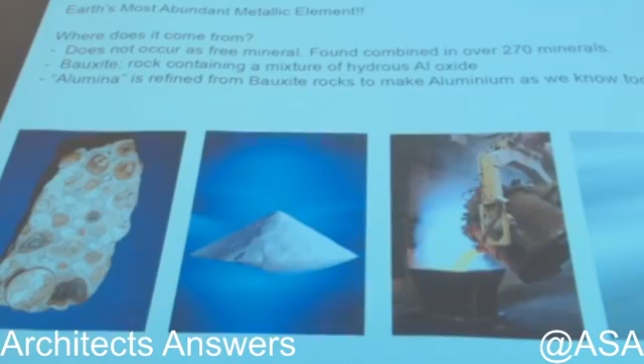So it comes from bauxite, and it's also found in over 270 minerals, but mainly we get it from bauxite, and from bauxite we get the hydrous aluminum oxide or alumina, and then it's refined. So 4 tons of bauxite will give you 2 tons of alumina, and then that will give you 1 ton of aluminum. So it really wasn't used until the technology caught up with the methods of extracting and forging and purifying it. So in the beginning, it could be used as a decoration or something valuable, like this baby rattle, and it was so valuable at the time that the top of the Washington Monument in Washington D.C.

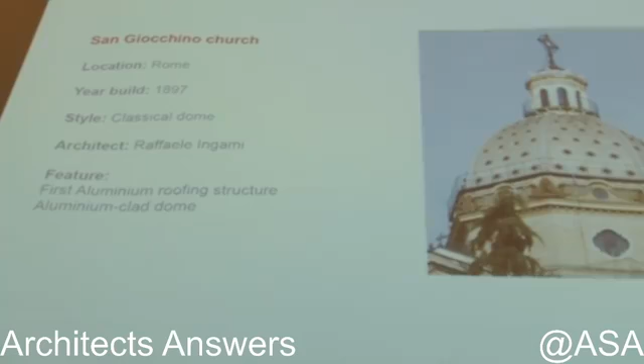It is solid aluminum at a cost then, or today, of $640 per pound. So you can imagine the value then of that piece of aluminum. But as time went on and technology increased, we started to use it on buildings. This is the first example of aluminum roofing: clad domes in Rome in 1897, and then the Art Nouveau facade from Otto Wagner in 1902.

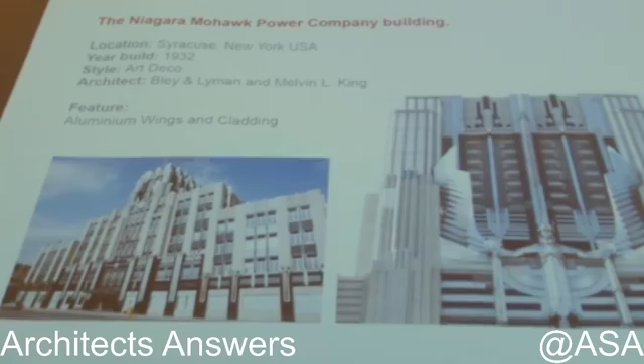Times Square Building in Rochester, New York, 1930, but mainly used as the ornamentation on the top, as well as this building in Syracuse. It's quite malleable and formable, so they used it as a decorative application. And it wasn't really until 1950 that it was used as a full cladding application. This is the former Alcoa building, or the Regional Enterprise building. So the entire 30-story building is this stamped solid aluminum panel.

There are three main types of aluminum cladding products. We have rolled, cast, and extruded, but for our purposes here, I'll just talk about rolled products, as that's primarily what we use in the facade business, although we do use quite a bit of extruded products as well. There are two main types of rolled products. We have hot rolled products and we have cold rolled products.

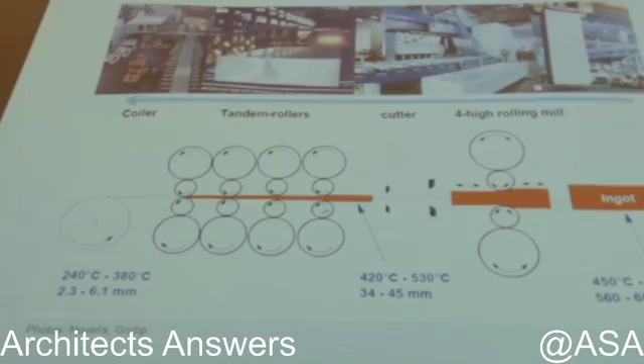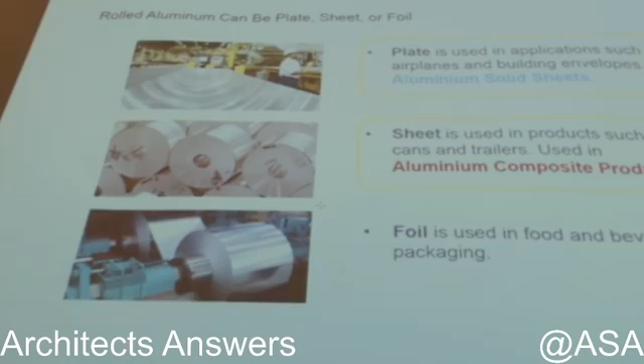And from these products, we can get plates, sheets, and foils. The foil industry is a big industry for aluminum, as you can do lithography and other kinds of foils. Also, for our sake, the sheet and solid sheets come from plates and sheets we use in thicknesses of 0.3 millimeter all the way up to 3 millimeters, and this can be used in composite material as well as solid sheets by themselves.

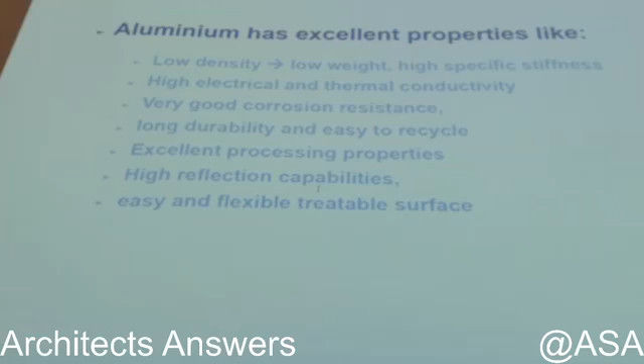As I said earlier, aluminum is an element, obviously, and by itself it does have some excellent properties. It's low density, it's resistant to corrosion quite well, and it's durable, and you can recycle almost 100% of solid aluminum. It's great for processing and it has high reflection capabilities. But by itself, it's not appropriate unless we add other parts to it. And this is where we get into alloys.

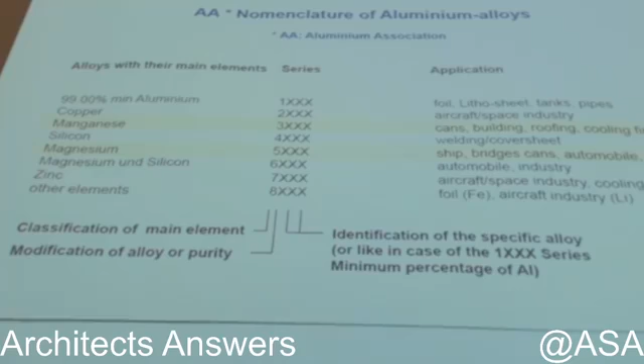For architectural projects, for the rolled products, we primarily use the 3 series and the 5 series. So this is a manganese or magnesium additive, which increases its strength. But from there, we cannot just use it like that. We have to adjust its hardness in order to be applicable to a specific use.

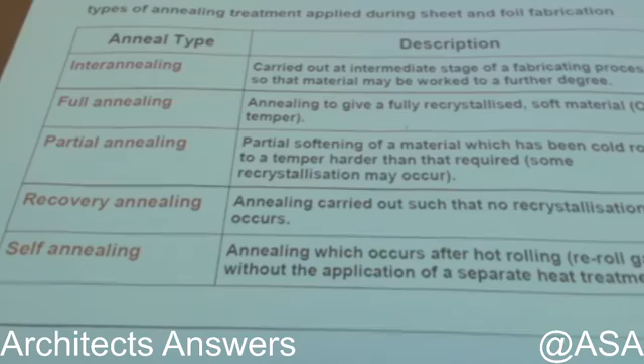So in this case, strain hardening, which is indicated by an H in its temper nomenclature, where we compress it through the rolling to stiffen and harden the structure of the aluminum, and the opposite would be the annealing process to soften it. And these are some of the nomenclatures that we find. So strain hardening is typically what we find in facade cladding.

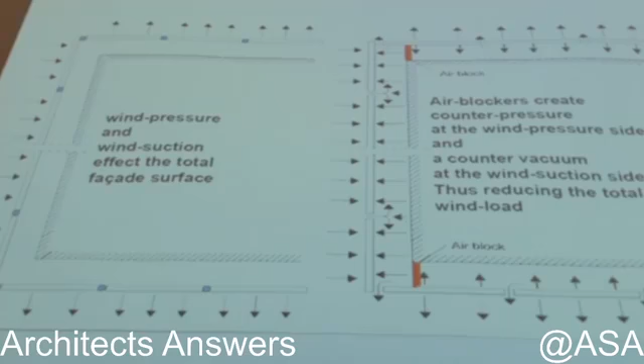And all of this is important because we have many physical forces that act on our buildings, primarily wind load and other forces that we need to be able to transfer from the facade into the building and deflect away. So when you compare, let's say, a closed joint system with an open joint system, you can see that there's an imbalance of the pressure. Where the wind hits this side, there is suction on the other corner, as opposed to an open joint system with air blocks, where the pressure is neutralized.

to stress that not only the design, but the alloy that you choose in solid sheet for your material matters. The idea is we have to transfer the loads through the substructure into the main structure without permanent deformation of the facade. And the way we calculate it is a membrane calculation. It's not a box structure. It's actually a membrane, so we have to calculate it as such.

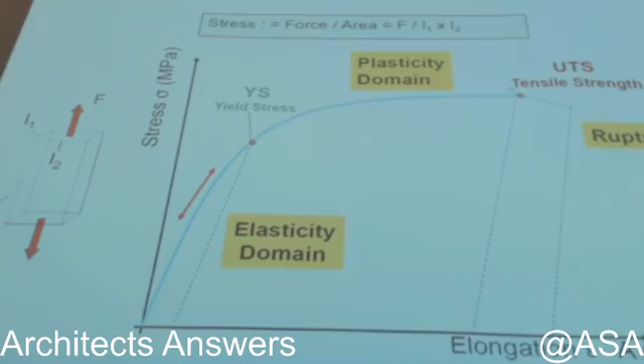And we talk about the elongation or the tensile strength of a sheet. At a certain point, the alloy will fail based on the stresses and the physical loads. And why is this important? For example, we have stress in the membrane at the corner. When we use a solid sheet, that force is evenly transferred, whereas if we were to use a composite material, we typically only have 0.5 millimeters of material. In this case, we have to add more substructure to the joints to be able to take the loads.

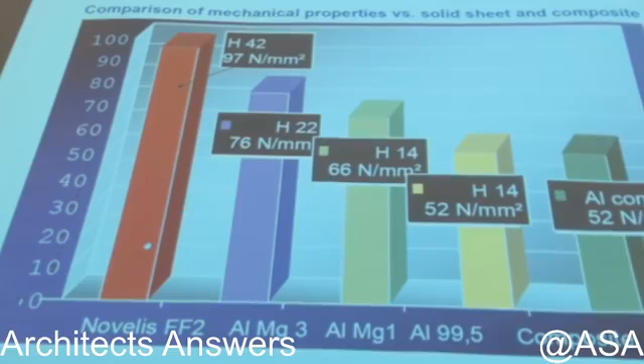And here we can see the mechanical properties of the different alloys in comparison with each other and the composite. Down here at this end, the performance of composite would be about 52 newtons per square millimeter, as opposed to different alloys up to 3 series, and then here's a high performance 5 series which can take 97.

But saying this, you can't just have a flat sheet. And this is maybe a benefit for solid sheets: you reduce the amount of substructure depending on the method that you construct the panel. If you take a flat piece of paper, it will sink. But if you put two bends in it, it creates a beam, a self-supporting beam in the material.

And you can add more curves. This one has 2, so actually we're strengthening it twice. Every bend is a new reinforcement. And that bend reduces the span width that you need for other substructure.

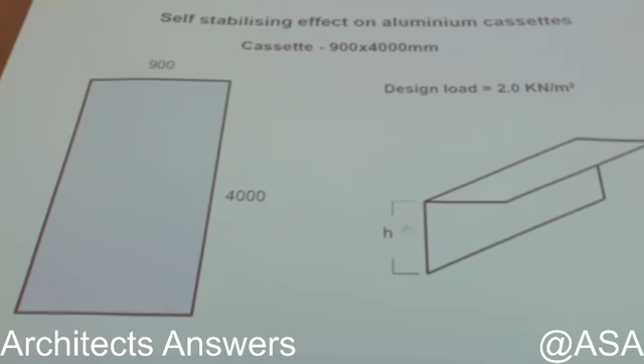For example, if we take a 90 centimeter by 4 meter, 2 millimeter sheet of 5754 alloy with a bend, we can compare if we bend it by 20, 30, or 40 millimeters, how many stiffeners you'll need in the panel. Typically the kind of work I see with composite is just a 20 or 25 millimeter bend. If you increase with a solid sheet to a 40 millimeter bend, you only need 2 stiffeners for a 4 meter sheet, at a wind load of 2 kilonewtons.

And what does this mean? It means that we can span longer distances, and eventually we need less substructure. Here we have a 1000 series: you need 4 millimeters to get a 45 centimeter span width. For a typical 3 series, you need 3 millimeters to get 66. Whereas if you use a 5754 alloy, you only need 2 millimeters, and that will give you more span width. You're saving the cost of the aluminum by about a third, taking 1 millimeter out of that material.

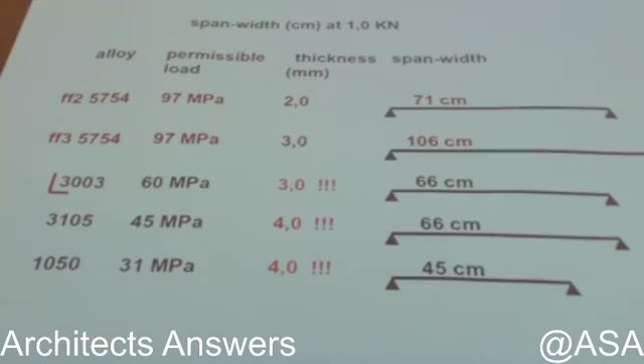They do the same in the Maritime Museum in Denmark as well, where all of these footpaths and stairs are mill finished aluminum. The idea is that it weathers, but it still retains its structural dignity. Nothing on top of it? No, nothing.

And then there's the other type of natural finish, the anodized finish. It's not an additional thing that we put on top of the coil; it actually is the material itself. We cut off the top third of the outer coating, and anodizing is a controlled oxide. If it were mill finish and you let it be, that would be oxidation as it is. But with a controlled process, we can guarantee a consistent finished product. And how we do that is we etch the top off.

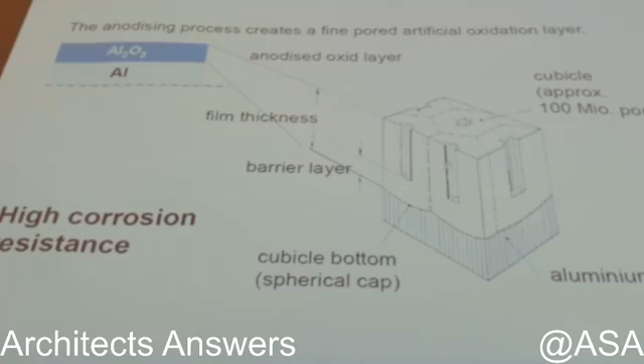This is the top anodic layer. And in the cross section of this, it'll have different pores. And there are two main ways of doing the anodizing process. One is batch anodizing, and the other one is continuous anodizing. There are pros and cons to both. It's just a matter of what's appropriate for your project.

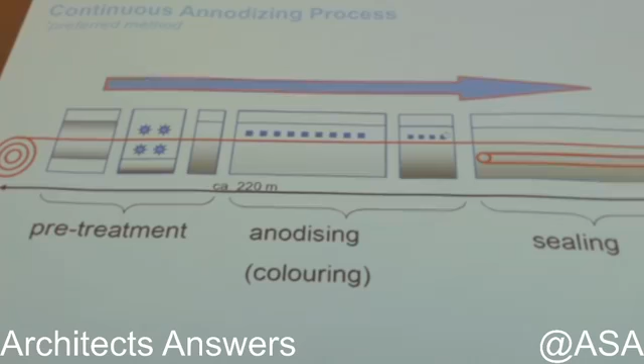Then we have the continuous anodizing process, and if you're looking for consistency throughout the entire coil, throughout the entire project, this is what you would use. And the important part here is the pre-treatment. And in the anodizing process, we can also introduce color. So several different colors you can have for the anodizing. And then after that, we seal it. So we seal those pores in the top.

If we look at the kinds of alloys you use, it's important that you choose an alloy, if you're going to anodize, that's specific for anodizing. If you see here, this is the commercial quality alloy, and then this is one that's specifically engineered for anodizing. It's more homogeneous. You can see it's distributed more evenly, whereas this one is striated, there's layers.

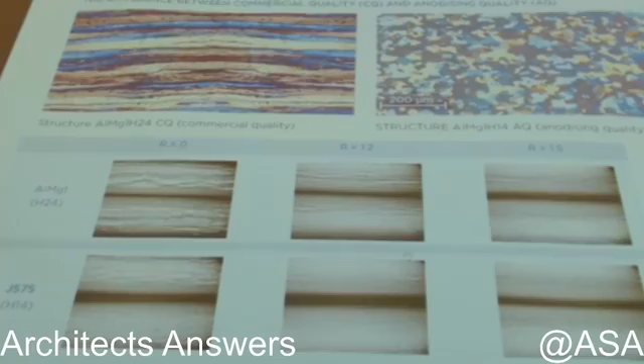And what you can see as a result is when you bend, there'll be more cracking. This is R0 and radius 1.2, radius 1.5. You can see the difference for the corners of the cassettes.

Then we move on to spray coating. We have post coating and then we have the pre-coating process. So this is the post spray, post coating. And in that we have powder spray and wet spray. Mostly we can see powder coating is a method where you have the powder paint and then it sprays, and through the electric current it will stick to the surface, and then you heat cure it.

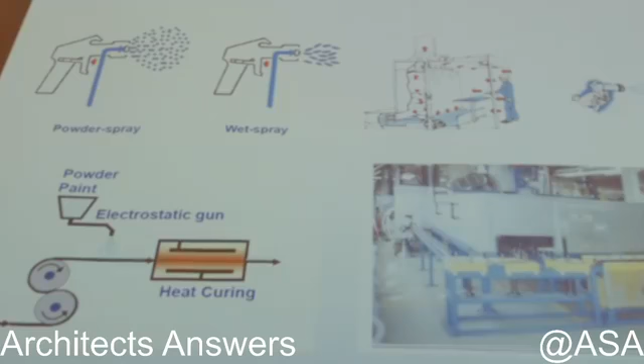The problem with this sometimes is that if it's done by hand, it can be inconsistent in the results. If you have a machine do it, it's more consistent, but we need to have a thicker layer of coating because, as you see, the flakes are quite large, and the inconsistencies in the actual molecular structure of the powder require that you do a thicker coat. And also, it's very difficult to do pre-treatment on this, so there might be issues with sticking to the coil or the sheet.

Coil coating will allow for the most consistent process for applying paint. We have a tub of paint, pretty much, that picks up from one roller and then transfers it to a secondary roller. This is to ensure that the paint is distributed evenly on the roll, and then we pass it through an accumulator, so if we need to stop a line, these accumulators will grow in height, and then when it starts again, they'll shrink down to accommodate the change in the production schedule.

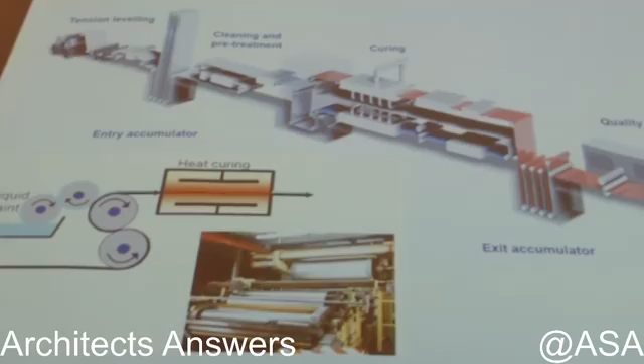The most important part, I would say, besides the actual paint product that you use, is the pre-treatment. I'll get into that a little bit further, but without a proper pre-treatment, you will not have good adhesion of the paint to a coil. Mainly, we're using the polymer paint family. So it's a PVDF, which is polyvinylidene fluoride, or an FEVE product. We've been through some of this already, so I will try to go into a bit more detail. But also newer kinds of technologies with hydrofluoropolymers and super durable polyesters.

With pre-paint systems, you can select any color possible, and they use the RAL color chart, NCS, and even if you create a new color, it's possible to create this color.

Primarily, you see PVDF in this, and what's important is that you see the aluminum, we have a pre-treatment coat, a primer coat, and a color coat. So this is technically a two-coat system, and the thickness is only 25 microns, plus or minus 3. So if you compare that to a powder coat, it's about half or more than half the thickness.

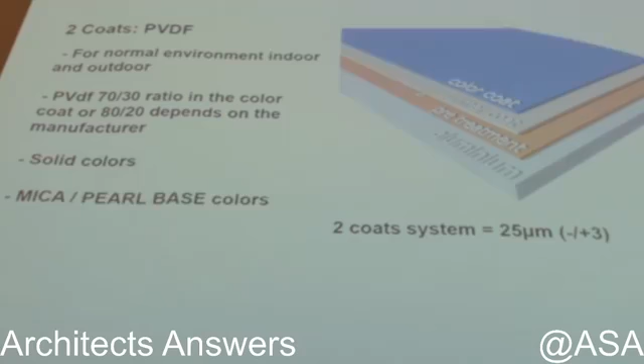And important in this is the ratio of the polyvinylidene fluoride. Typically in the industry, you can see 70-30 ratio, but some companies will provide 80-20, which is 50% stronger. A three-coat system, where you put a clear coat on top, and then a four-coat system. These would be mainly for metallic colors, where you have suspended in the paint metallic flakes, which can change color or give sparkle to it. And this total is still less than a powder coat thickness.

A lot of times I see in specifications requirements that the coating must be 50 microns or something like this, without any regard to the technology or method of the coating system. So as architects, it's important to look at what is the specification of the painting system.

Fluoropolymers. Basically PVDF is a binding solution that you mix with the resin of the paint. And so the more of this PVDF you have, the stronger your paint will be, the more resistant it will be to fade. It will keep its gloss longer. So also be mindful of the percentage of the PVDF when choosing your paint system.

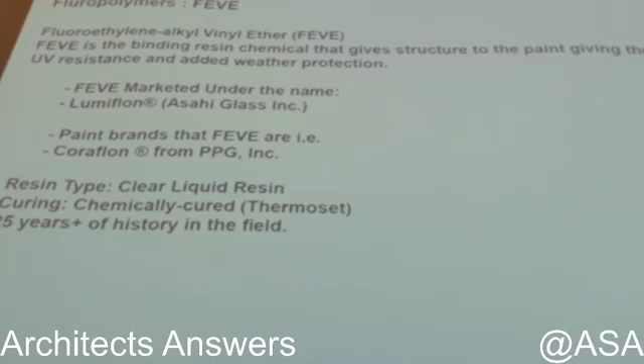And then we have the fluoropolymers. I think the previous presentation touched a bit on this. There are several names that use this technology. Lumiflon would be one. Also, there's one from Coraflon from PPG. And it's a clear liquid resin. You mostly see the higher gloss finishes with this technology.

And here, just to give you an idea of the comparison, I know we've seen some of these colored comparisons before. But this is the Florida sun test, and you situate the panel with these different coating systems at 45 degrees facing south, and over a period of time, they can compare the fade. And you see polyester or plastisol, and acrylic also perform very, very poorly compared to the other types. Also, the gloss retention. This one has the Hylar 5000, which is a PVDF product, outperforming the others.

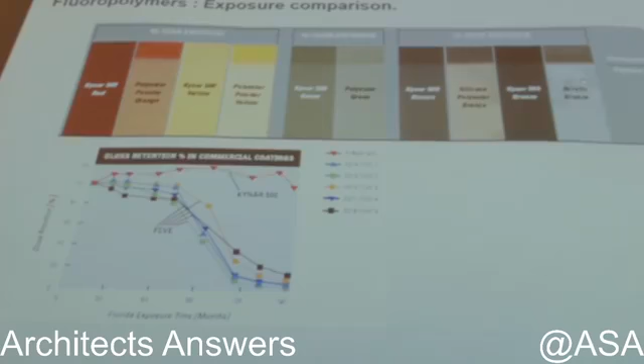And then we have the 10-year exposure, 15-year exposure, and the 17-year exposure. You can see examples around town where the color is completely missing. And red here is usually the first color to fade. So if you're going to have red in your buildings, it's very important that you think about which kind of paint technology you use.

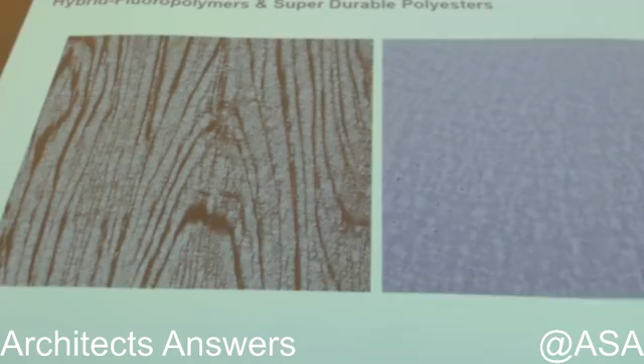There are also other kinds of hybrid fluoropolymers, and this is where we can get into more textured paint, more depth, more color options. We can do patterns, textured. This is like a doppel effect, and this is a wood effect. We can also do textured PVDF coating, so stone.

A lot of times, if you have a stone building, stone is very heavy and it's more expensive to install. So what they'll do is they'll put stone on the first few floors, and then above that, a few floors, they'll replace it with a stone, a solid sheet, and you wouldn't be able to tell the difference if you looked at it.

Also, different kinds of metal optics. This is a Corten look or a patinaed copper look. You can also do stainless steel effect. Saves money, stainless steel is more expensive. So if you have a project where you like to have something that's not the real thing, copper also is very expensive.

Multicolor, this would be in the four-coat system where you have pretty much metal shavings or glitter suspended in there, and then based on the angle, we saw an example in the first presentation of how the color can change with one sheet. So depending on the angle, it changes the color.

We also have this kind of technology where it's graffiti-proof, where this facade has been spray painted, and they can just use a pressure sprayer and a scraper, and it comes off.

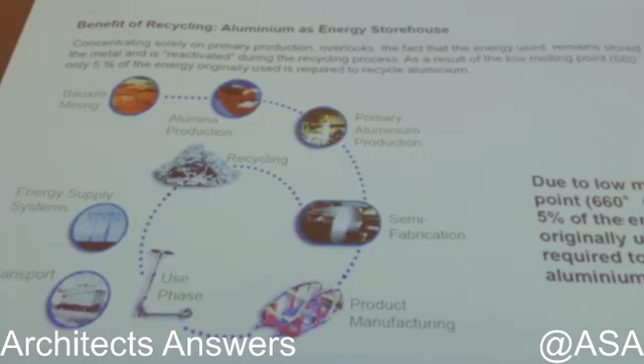If you look at it, this is a typical life cycle of aluminum, where, as I told you before, we can mine it from bauxite, then refine it to alumina, and then further refine it into solid aluminum. And then it goes into the production of its end process, so other rolled products, cars or other things like this. But once it's ended its life cycle in that application, it can be fully recycled. And the benefit is that you only need 5% of the total initial energy required to make the new aluminum.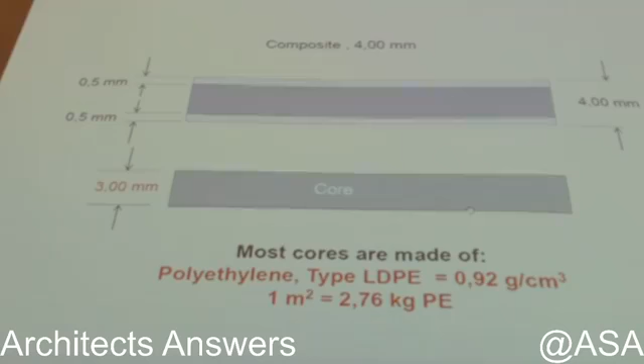I know a lot has been said about fire safety, but I'll just go through it a little bit because I do think it's important for all of us. We think about risk: frequency times the consequence is how you get the risk. So whether it's fire or other kinds of loads, we need to think about the decisions we make in our design process to minimize the risk. And I know this one was mentioned before, where 72 people died in London. This was a PE core, polyethylene core, and you can see 3 millimeters of material.

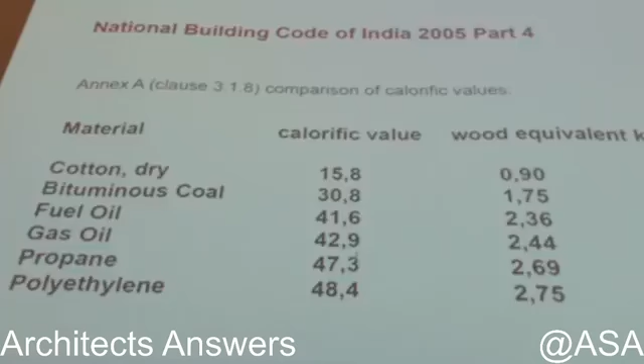And so 75% of that panel is actually an oil. And you can see, as an oil, you have polyethylene here. It actually has more calorific value than even fuel, so it's actually more flammable than things like gas or propane. And from this, we can see similar data. That means if you're using a polyethylene core building, 1 square meter is equal to 3.8 liters of fuel. And if you multiply that over the span of the building, this is the equivalent of a giant oil tanker on your building.

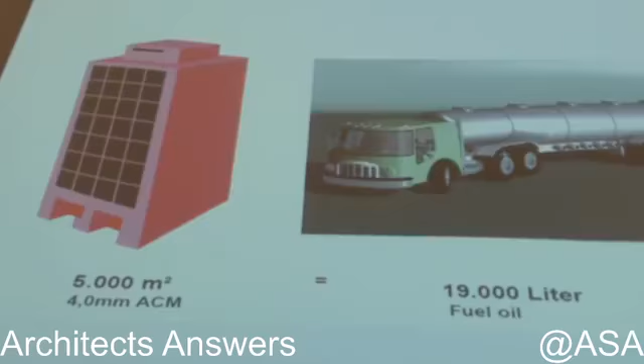The good news is that solid aluminum does not burn, does not create smoke or poisonous gas, and because of this, it is a pretty good solution. I won't go through all of these. These are all of the different standards, international fire ratings that were previously discussed. We have the European standard A1 and A2 that was thoroughly explained earlier, so I won't go into that so much.

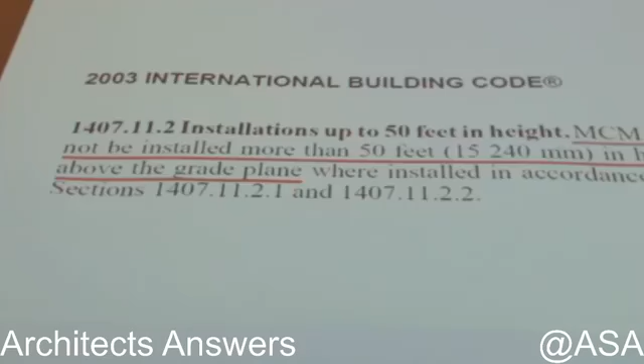But I think one thing that's important to mention is that you may have projects in other countries, or even Thailand might be changing their laws and regulations. So if we look at other international codes, we can see that most countries following these standards do not allow anything combustible above a certain height. In the British case, 18 meters. And in Europe, it's even more strict, where they don't allow any combustible materials in any kind of schools, libraries, hospitals, hotels, airports, stadiums, anything with a lot of people.

And actually, for insurance reasons, this would be important for the building owner: anything combustible used above a certain height may not even be insured by the company. So as a building owner, I think this is an important aspect to pay attention to.

10 minutes. 10 minutes left. Good, water.

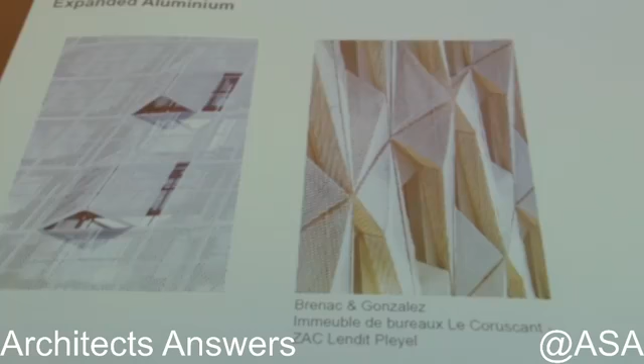As I said, the solid aluminum sheet products, rolled products, are quite versatile. We've seen that they can be used in composite material. It can be used in solid material. It can allow for multiple perforations, changes and manipulations without degrading the material itself. And here are some examples of different types of solid sheet applications.

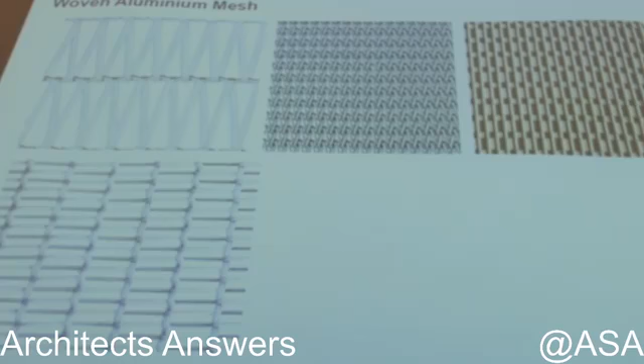We have aluminum mesh, where we can pretty much use the same technologies as a textile weaving, only using aluminum. So the coil is cut into thin strips and then fed into a weaving machine. We can pre-paint these. These can be anodized. It can be mill finished. You can post paint. It's quite versatile.

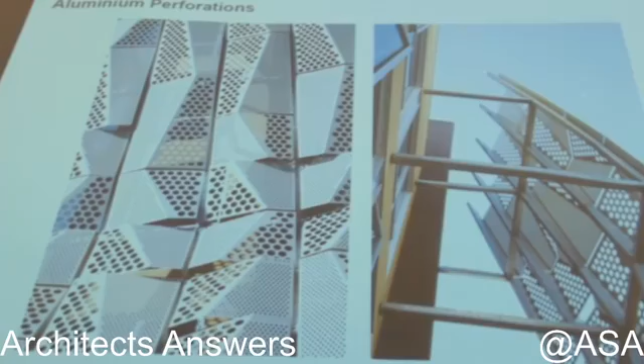Perforation obviously is a method that's quite well known. Corrugation, where we run it through corrugated machines to create different profiles, so this adds a bit more depth to the facade. And this would be a pre-painted system.

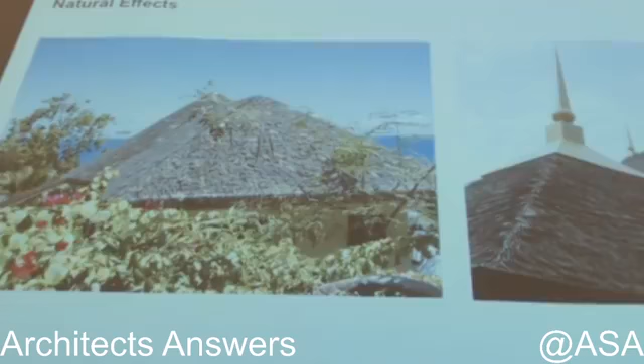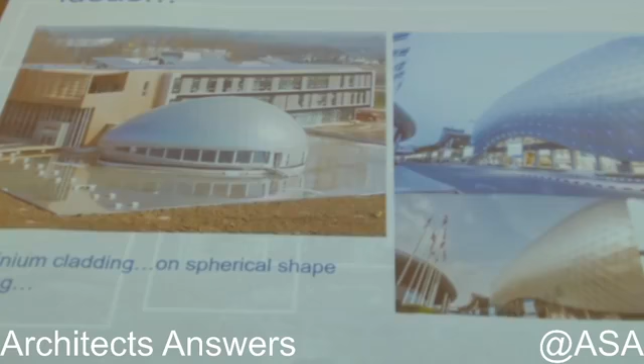Different shapes of cladding, like this one, a spherical shape. The left side building is in Europe. I'm not sure exactly where it is, but thanks to our colleague here for sharing this photo. And on the right hand side, I think everyone knows this is in Thailand. So we can shape the cladding into different forms as we want.

Used in canopies, a ceiling, or cladding for MEP areas or carport areas. This particular one is a perforated ACP, or a 3-dimensional look of aluminum composite cladding. Used also in the airport. I think this is the local airport here. And used in offices, simple flat, diagonal shape, sloping shape, and also in universities.

But what are the factors that we need to consider when we design aluminum cladding? First, we need to know our materials. What do we have in mind? What do we use? Whether we use ACP, A4, A1, A2, FR4, or PE core, when do we use it? Or aluminum solid sheet, as Elliot mentioned. Within the materials, we also need to know the size of the materials that we're working with, the coatings, and others like physical properties and constructability of the materials.

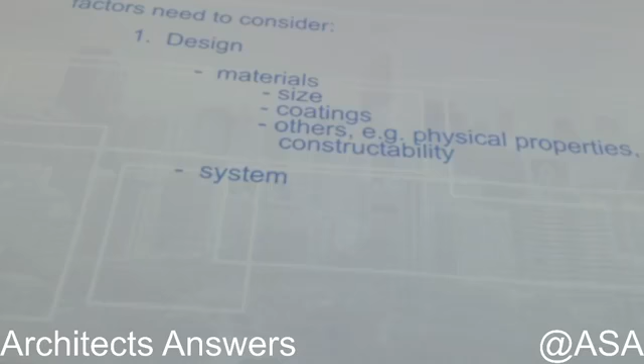Next one is the system to be used. Not many architects, especially young architects, may have a very deep idea of the aluminum cladding system to use. But an experienced designer, like Patikon, knows very well the different kinds of systems for aluminum cladding. Basically there are two main things, an open joint system or a closed joint system. I will touch on this later.

And then execution. When we finish our design, how are we going to install this? Is it easy to install? Is the contractor capable of installing this? Is the contractor capable of fabricating the shape that we want? So these are the things that we need to consider. And then maintenance. How do we clean our cladding? And how do we maintain or replace our cladding panels when something is done?

Let me start with aluminum solid sheet. Aluminum solid sheet standard size can be 1,200 mm or 1.2 meters wide up to 1.5 meters wide. Please correct me if I'm wrong. And the length, based on my experience here, the most commonly utilized length is 8 feet, which is about 2.4 meters. But this can be customized up to 3.6 meters depending on the manufacturer. I think Elliot showed a 4 meter cladding earlier.

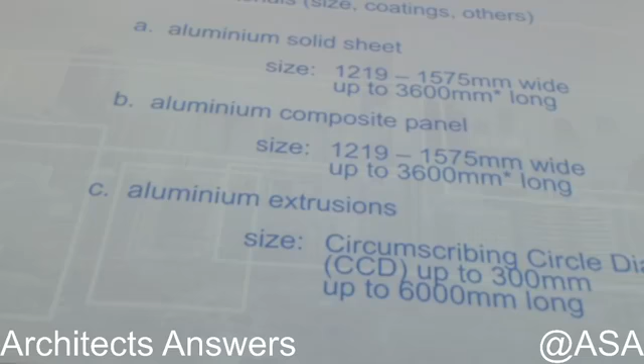For aluminum composite panel, it's a similar size as solid sheet, 1200 to 1500 mm wide, and the length can be customized depending on the design requirements. And aluminum extrusions. Some of you might not be very familiar with how the size works. Aluminum extrusions work with CCD, or circumscribing diameter. Currently in Thailand, the largest CCD that an aluminum extruder can do is 300 mm. But the length can be customized up to 6 meters long.

What is CCD? CCD is the circumscribing circle diameter. This is the size of the extrusion that we can shape. So when you say 300 mm, that means we can shape any extrusion to the shape we want within the 300 mm diameter. And there are only very few extruders that can do it in Thailand. As far as I know, there are 2. But if the design goes larger than 300 mm, then we can do a series of extrusions and put them together.

And then the coatings, I think the three speakers earlier mentioned these coatings already. One is PVDF, the next one is FEVE, or powder coating and anodizing.

So, well, okay. So the other that we need to consider is the alloy. This is also mentioned in the previous talk. So there's series 3000, 5000, and then the tempering of aluminum sheets, H11 up to H14. For extrusion, the most common use for structure is 6063. The tempering is either T5 or T6. I will not focus on the detail of this one.

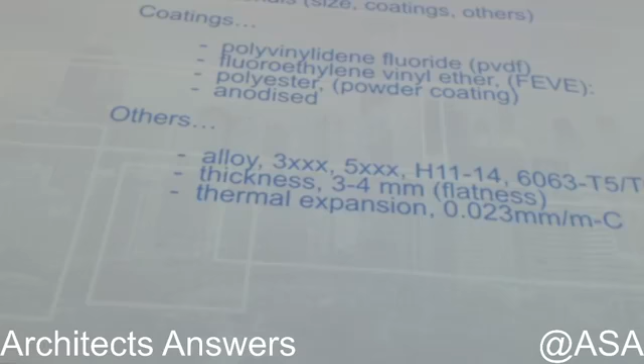And then thermal expansion. This is always neglected in the design. I've seen aluminum cladding designs where the designer wanted a hairline joint, which is like you could see only a single line. When the aluminum is exposed to an environment more than 20 degrees Celsius, it will tend to expand. The thermal expansion of aluminum is like 0.023 mm per meter per degree Celsius.

You see, in Meinhardt requirements, we always try to allow thermal expansion of aluminum 1 mm per 1 meter. So just imagine that if you have a hairline joint cladding system, there's no room for expansion. So what will happen when the aluminum expands? I will show you some photographs later on.

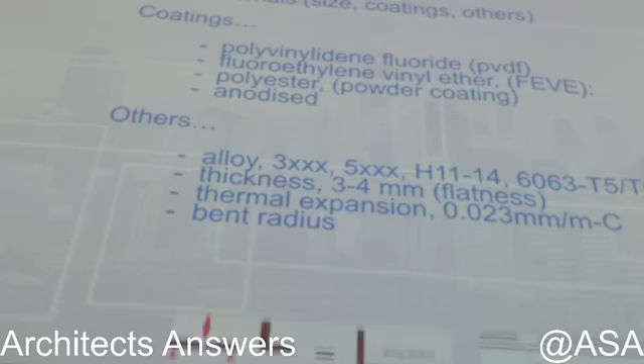On the bend radius, like Elliot mentioned, we cannot have a cladding that is just a flat aluminum sheet or flat composite panel, depending on the design and the structure supporting behind it. So to strengthen it, we have to bend. And so we need also to know how much we can bend our materials. What is the bend radius? For solid sheet, we have a larger radius. For aluminum composite panel, we can do a V-groove, which we can actually do for aluminum sheet, but fabricators mostly don't do it.

And then the system. The most common is open joint and closed joint system. Let me start with open joint system. We use open joint system when the substrate or the structure behind is already waterproof. If we don't have a solid structure behind, then we need to design the system that will waterproof behind.

Design in Europe and Asia are somehow different from each other. Like the slide shown by Elliot earlier, even this slide here, an open joint is required to have insulation behind it. But the most common basic design in Thailand, where we have a shear wall behind the aluminum cladding, we don't put any insulation. But we have projects currently where the lead designer requires insulation behind the aluminum cladding.

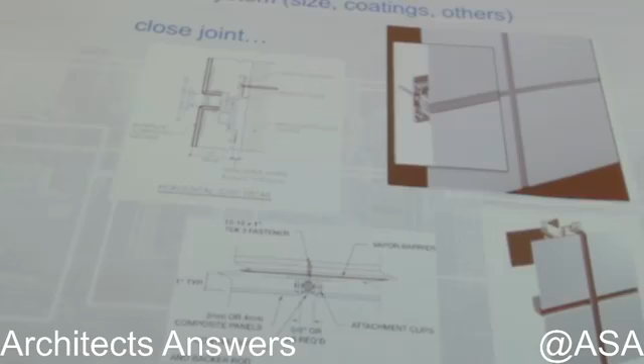So these are the things that you need to consider when designing a cladding with an open joint or closed joint system. Sometimes when I do inspection on site, I bring my own silicone tooling. When I see a worker not tooling properly, I hand this tooling material to them. Use this one. Do not use your finger, because the most common tooling material that workers use on site is fingers. Right?

Using your fingers, we have oil in our hands. One of the ways silicone will fail is in contact with oil or an unclean surface, so you will not have any adhesion. So we have to be careful when we're designing a closed joint system.

And then this is a big question: contractors' capability. Their manufacturing facility, is it good enough? Do they have sufficient machinery to bend your cladding properly, without cracking? Sometimes they don't even use a machine, they just use their own hands and a hammer to bend your cladding. And then the site team's ability.

I worked as a project manager when I was working for a facade contractor. The most common disappointment I had was when I told my workers that you have to finish 100% of the work before you move to the next level. But what they do is put up one panel, another panel, and then leave the joints open or unfinished. And I always told them, why don't you do it now? You have plenty of room to finish it.

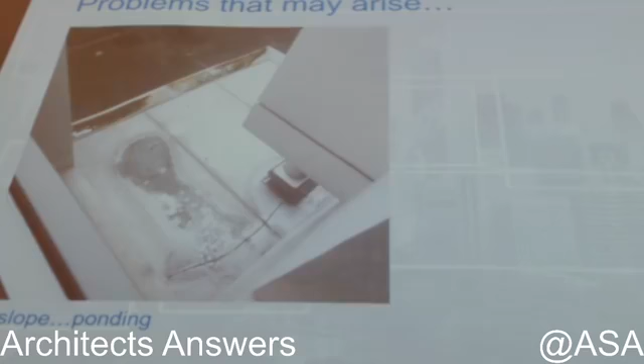And this one also, maybe some drainage was neglected. So it makes the cladding very dirty, with accumulated dirt and water flowing out in front of the cladding instead of sloping inside the building and to the gutter.

Strength of design or problem in installation. I always get a question from my client, like, Roger, maybe you over-designed the system. When we are designing, we always have certain factors that we need to allow. Factors of safety: in terms of the properties of the material, factors of safety in installation, and then how well workers can install or fabricate the panel.

It may look good on paper, but how much can we achieve from paper to reality? Can we achieve 100% of our design up to the installation? I'm not sure. Maybe some of you have done it, which is very, very good.

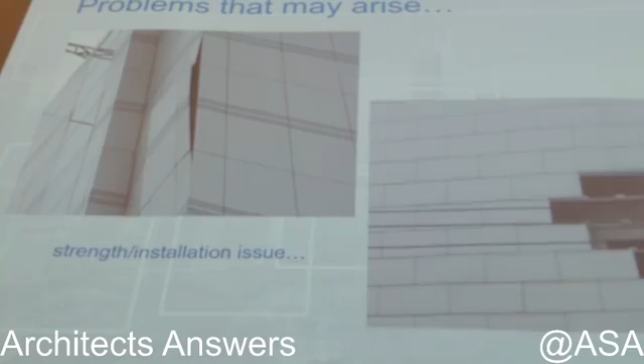So we may design it on paper properly with the proper calculations, but when we put it on site, are the installers putting it in the same way as we designed? So this is one of the factors that we need to look at when designing. You may design to certain factors, but you must allow for errors on site: construction tolerance, and then the biggest problem is human error. This happens on almost every site.

And then coating problems. I mentioned earlier, we have different kinds of coatings, PVDF, FEVE. So if we have fake or improper coatings, this may happen in our building: color inconsistency, color fading in a very few years' time, and color cracking. So those are the things that we need to consider for our material.

Flatness problem. The panels may be too big in our design, so maybe we need to install some stiffeners behind them. If you don't lock it properly, this may happen in our building. Unless you want a wavy building, then that's fine.

Flatness as well, and this is one example of the joint that needs to be considered. This one has a hairline joint. Normally, we recommend a certain joint between panels on the cladding, right? I mentioned thermal expansion earlier, but here the designer wanted a very small, hairline joint. So they put all the panels together without a bend on the edge of the panel, so it's just flat panels put together.

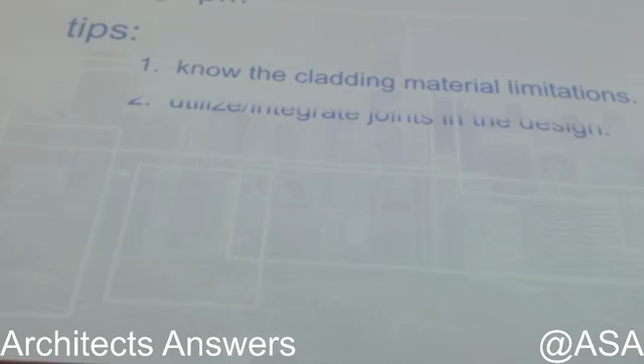So one of the things is knowing materials, so we know how to incorporate the joints in our design, whether we need to add additional stiffness or other reinforcement. Like I said, utilize and integrate joints in the design. When you say joints, like this louver, if you look at one element of this louver, it looks like nothing. But if you put it together on a certain joint spacing, it looks nice. There are joints that may not be visible on the building, so you need to consider what kind of expression you want for your building.

The next one is allow tolerances for fabrication, assembly, and installation. I don't know how much you've seen on site, but I've seen one of our projects where the structure is out of tolerance by 100 mm. The common practice in our specifications is we always allow for plus minus 25 mm for the facade design. But in reality, the construction tolerances also have limits. As far as I remember, if there's any structural engineer here, it's L over 400 or H over 400 for the slab. If you calculate that based on the current building design, it's about 25 to 30 mm.

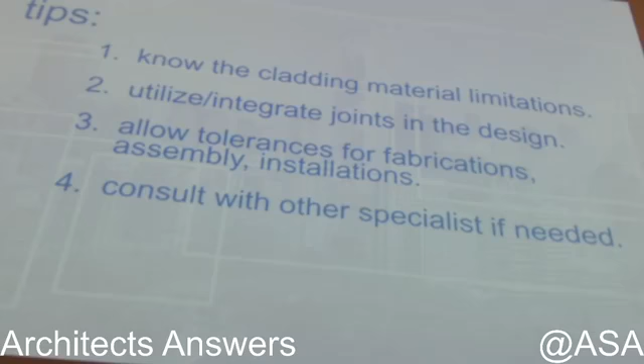And then, if you need to consult specialists for a specific design, please do so, because that will help a lot. I'm not an expert in everything. Not all of us are experts in everything. We are experts in something, so we can share knowledge to achieve our design. Thank you very much.